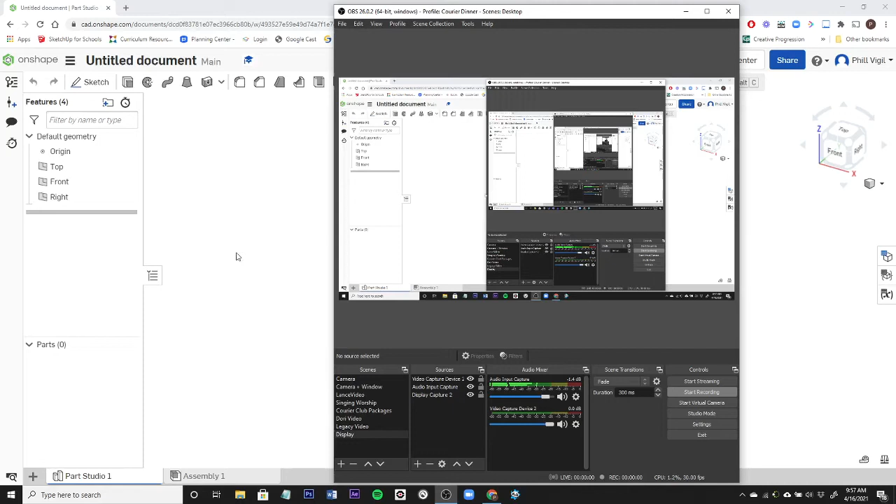Alright, I'm going to make a very quick summary of what the robot assignment should look like. This is just an example. I expect your robot will look different from mine, but there are two basic things we've covered in class

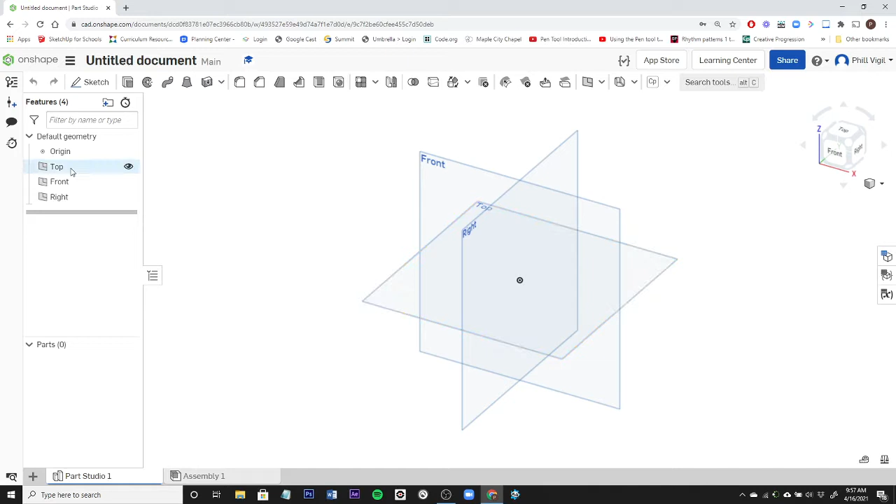that we're going to use and practice while making our robots. The first is like a hinge joint, and the other is a ball and socket joint. So let's get started. First, I'm going to model my basic robot body on the top plane. Let me hide the other planes. And I like to start with a center line, so I'm going to use just a construction line, and I'm just going to make it vertically aligned here.

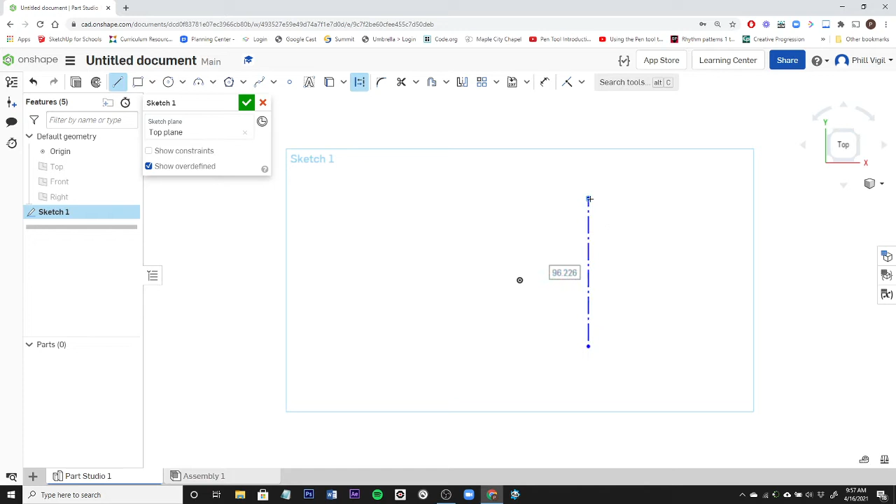And then let's go ahead and dimension this so I have a frame of reference for how large my robot is. I'm going to make this 100 millimeters. And then I want to make this coincident. Let's do the midpoint of this line attached to the origin. Alright, so this is going to represent the height of my robot when it's finished, so this will be the head and the bottom.

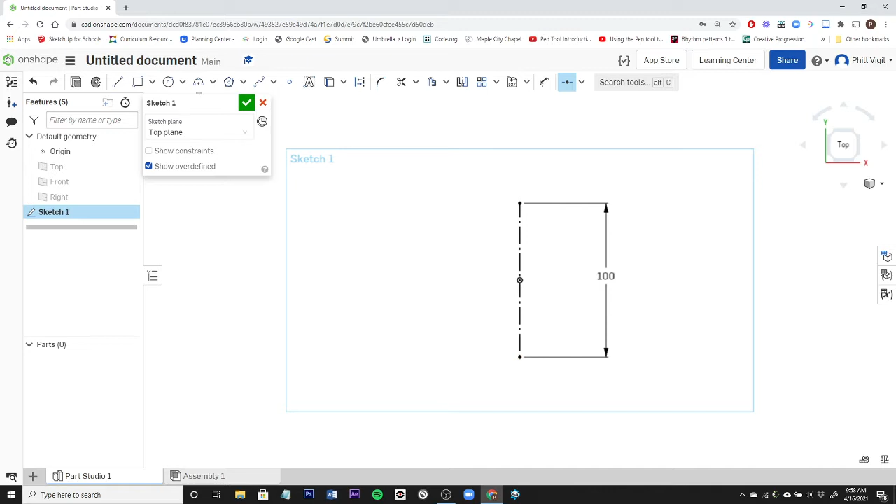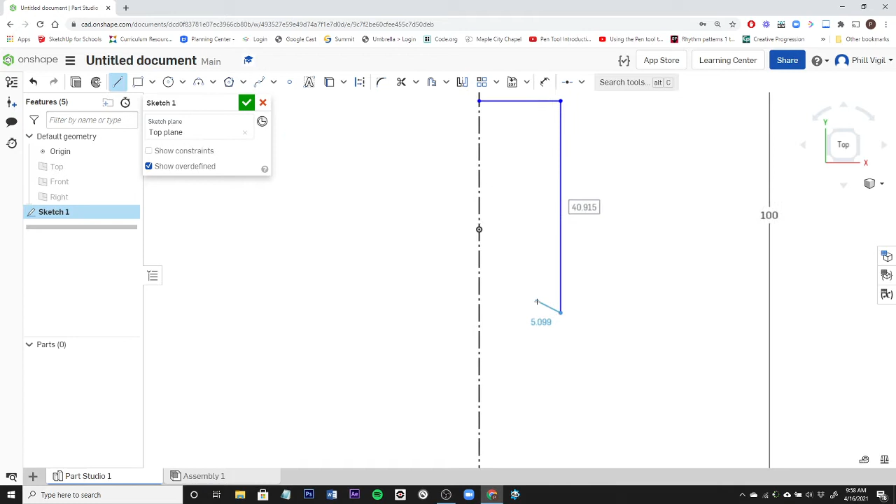Alright, so I'm going to just freehand sketch half of the body. I like to do that so it's nice and symmetrical on both sides. So I'm just going to do the right side first. So imagining the head is up here, I'm going to start the body about right here. Maybe down here. And then I'm going to intentionally make a little cutout where my leg is going to go.

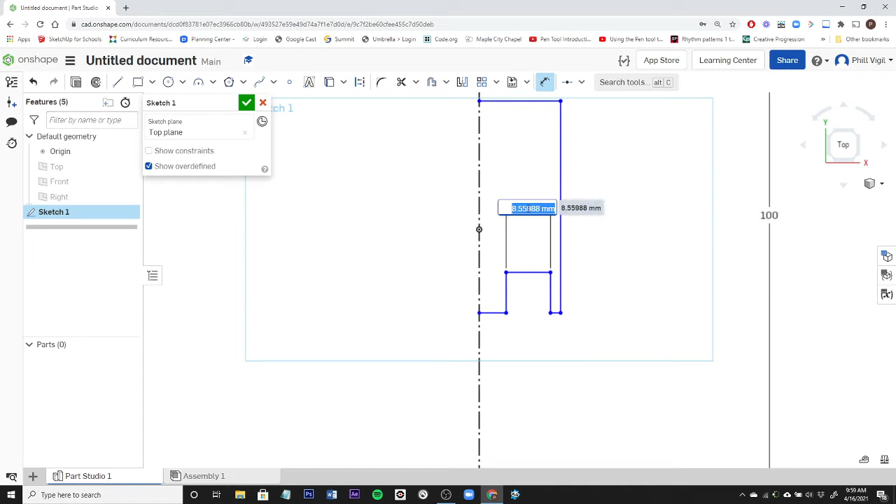I want this to be aligned horizontally. So that's my basic shape here. And just so I have a frame of reference, I'm going to dimension these. So I'm going to go ahead and make these all 10. So that will be 10, and then this will be 10.

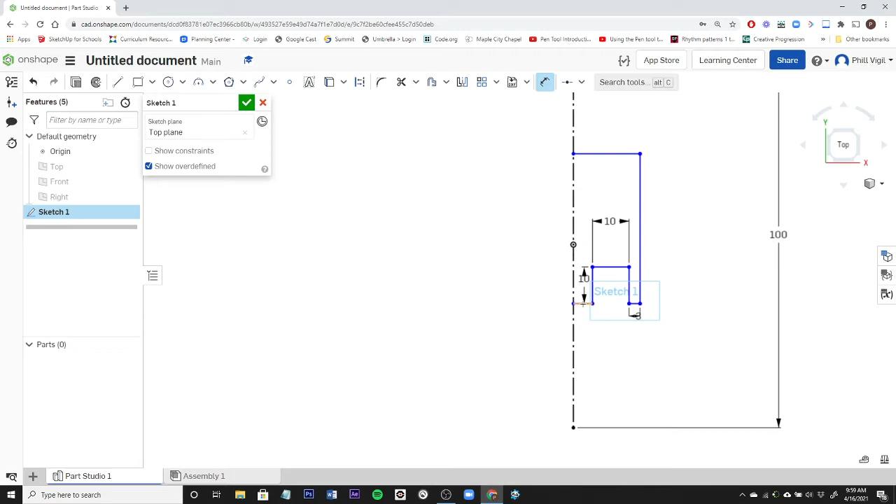And this is a little too small here, so let's go ahead and make that a little bit larger. I'll make it 3. That looks good. Maybe this will be a little bit smaller. Let's make this 3 as well. Okay, so here's my basic body.

Now I want to make a leg that fits inside here. And I could either make a rectangle, place it in here, or freehand sketch. I'm going to choose to offset these lines to begin with. So I'm going to use the offset tool. This is all just part of the sketching process.

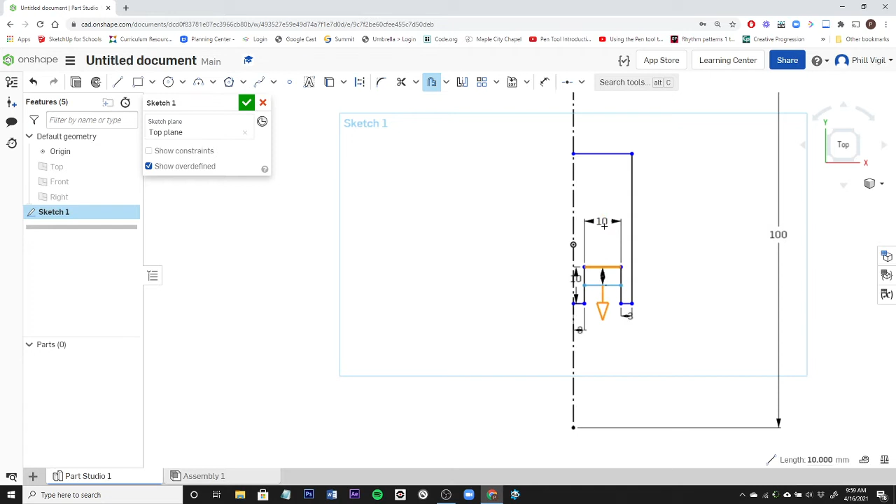So I need to reverse that, and then I'm going to zoom in and reduce the space here. Make it, let's do 1/2 millimeter. I want to also do that line and this line. So that gets me started on a leg, and I have a 1/2 millimeter clearance all around the sides. So I'm done with that, so I'm going to press enter to accept that.

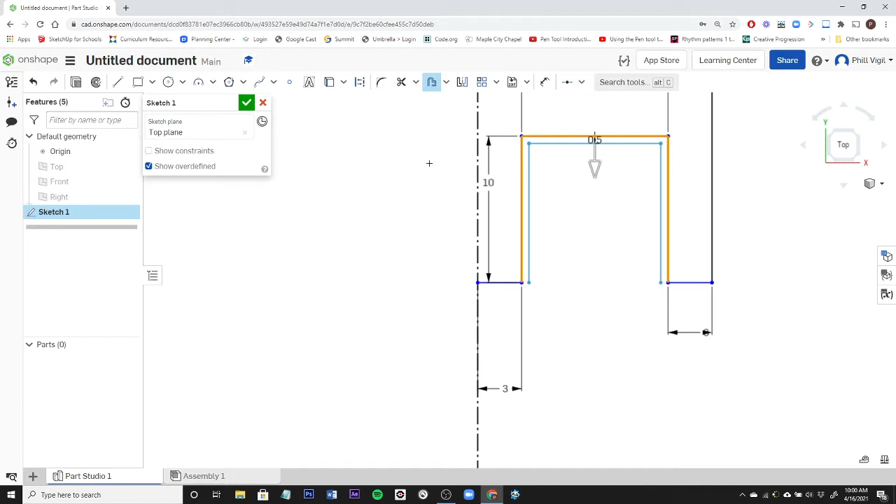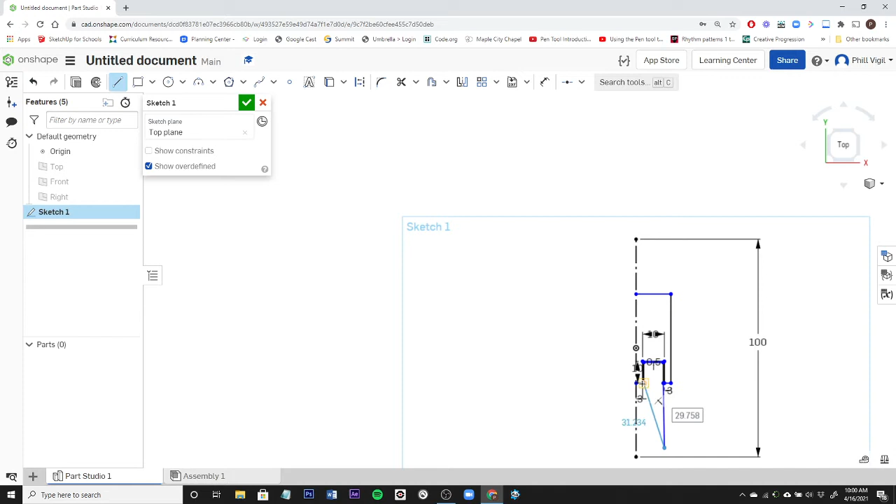Now I just need to extend these legs out. I'm just going to use some lines here. And I want this leg to go all the way down to the bottom here. I'll do a little bit shorter than that. I want to be vertically aligned with that line, and then attach it here. Oh, that was the wrong line, wasn't it? I may have attached that to the wrong line.

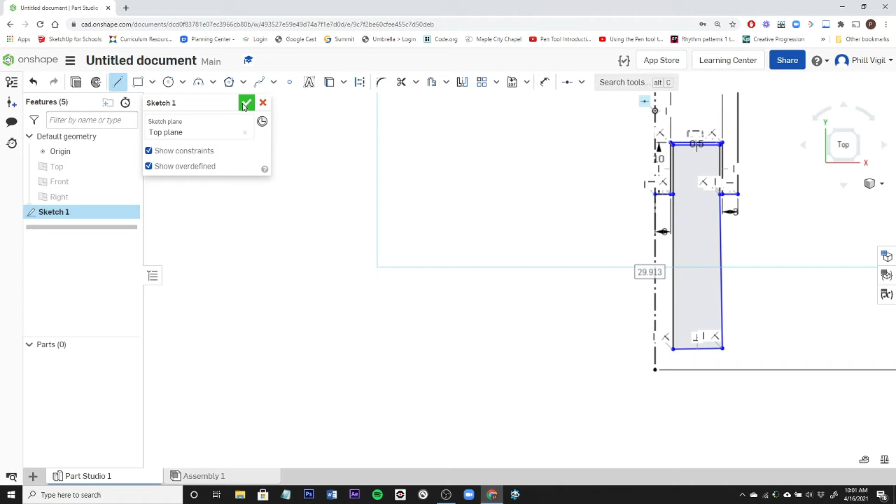That looks slightly slanty. So let me go ahead and show constraints. Did I align that horizontally? That looks good. So here's my leg. That's a closed shape. You can see now that it has a shading to it. So I could extrude that.

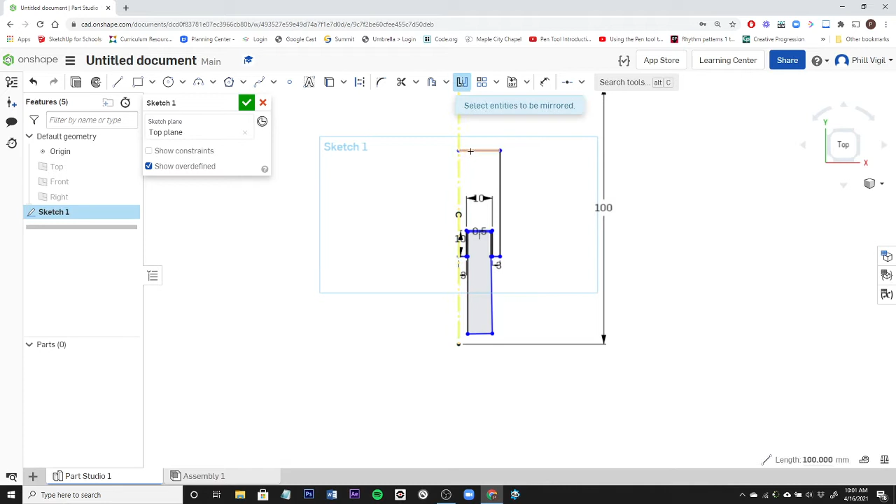I need to mirror my body so I can also extrude my body. So I need a mirror. I'm going to select the mirror line, which is the center line, and then choose the items I want to mirror. Now I have a closed shape here that I can extrude.

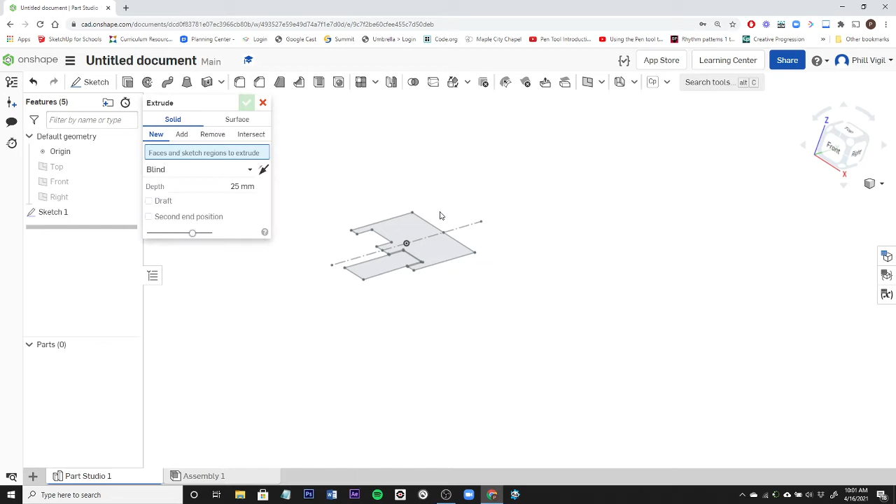I'm going to accept my sketch for now and go ahead and extrude these parts. So I'm going to use the extrude option. I'll do the body first. And I want to make sure that this is symmetric up and down. And then that's a little thick of a body. I'll do, let's do 15 millimeters, see what that looks like. Let's do 10. Okay. And then I'm also going to, so click the check mark for that, that's the body.

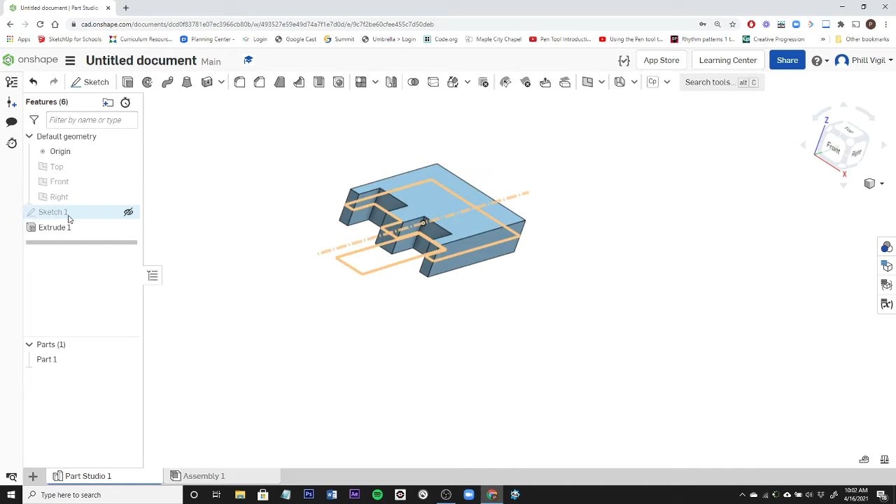The next thing I'm going to do is model two cylinders. One is going to be attached to the body. The other one is going to be used to subtract a hole inside the leg.

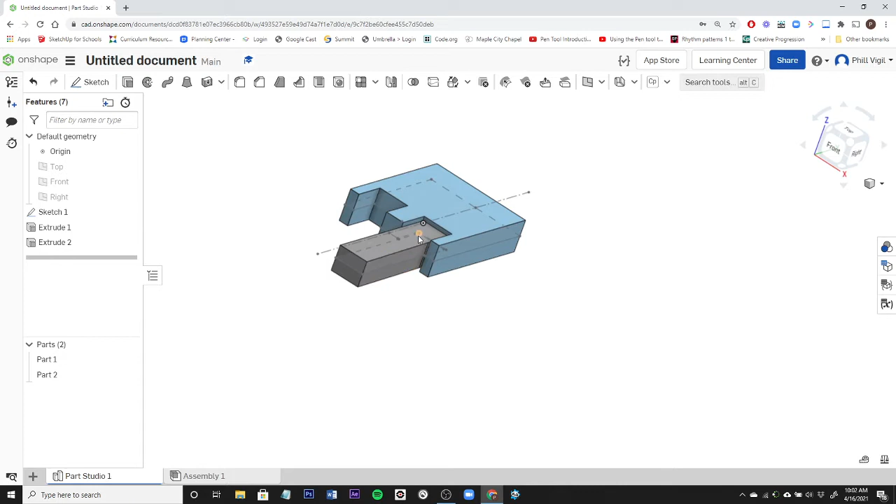Let's go ahead, and I'm going to be drawing on a new plane. I'll use the side here as a reference point. So I'll create a sketch and click on this face for my plane. Now I can sketch along that plane.

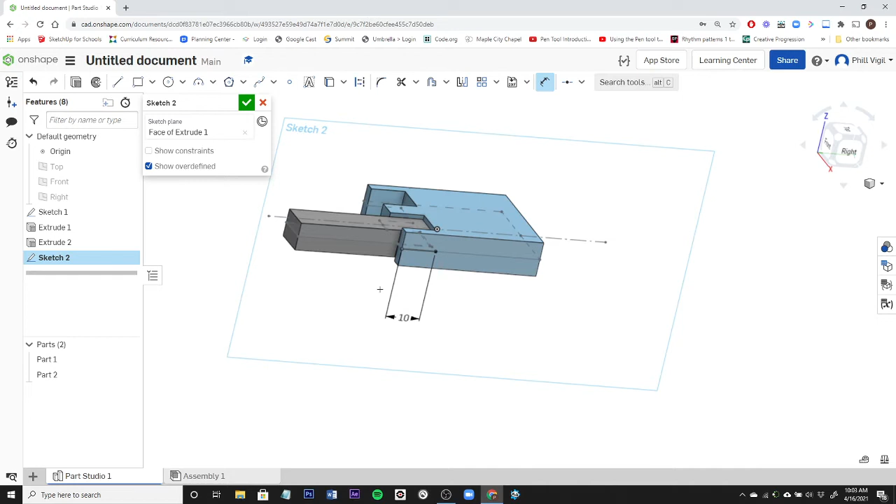I'm going to draw just a simple line here and make sure that it's 10 millimeters. If you remember the previous sketch, we made this opening 10 millimeters, so that's 10 millimeters this way and 10 millimeters that way. At the midpoint is where I'm going to place my first circle.

I'm going to grab the circle tool, use the midpoint there, and let's make this one 5 millimeters. This will be the larger one.

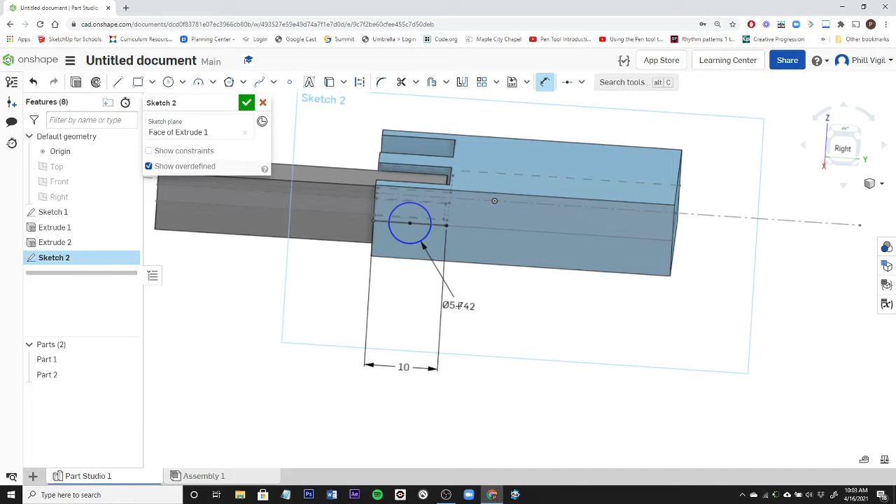I'm done with this sketch for now, and I'm going to extrude it. I want to use the extrude tool to extrude both halves of the circle, and I want to extrude it in the opposite direction.

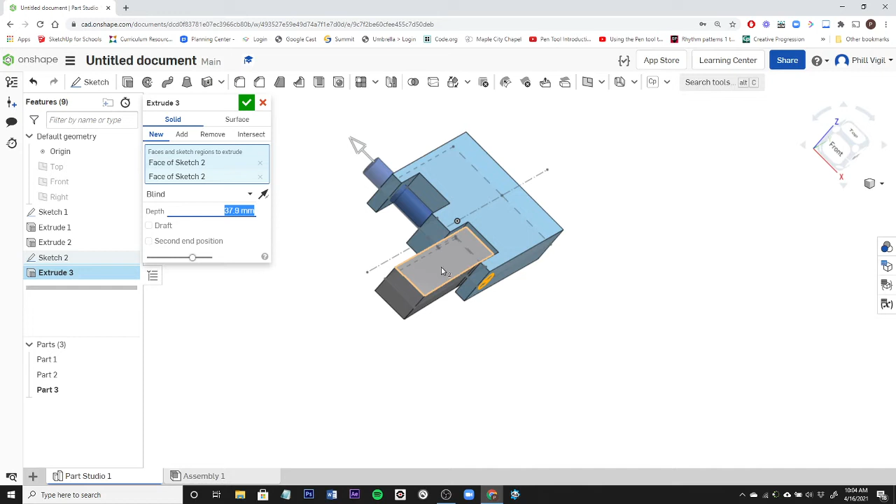I'm going to be creating a new part. Because it's touching multiple parts, it's assuming I want to add it to an existing solid, but I don't—I want to create a new solid. This one I'm just going to extend beyond the edge, because I'm using it to subtract from the leg. That's all for now. I'm going to choose the check mark.

Now I need to create another sketch, which is a cylinder that will be attached to the body. This will all make sense in just a little bit. I want to choose this same plane, and I'm going to hide my solid so I'm not distracted by that cylinder.

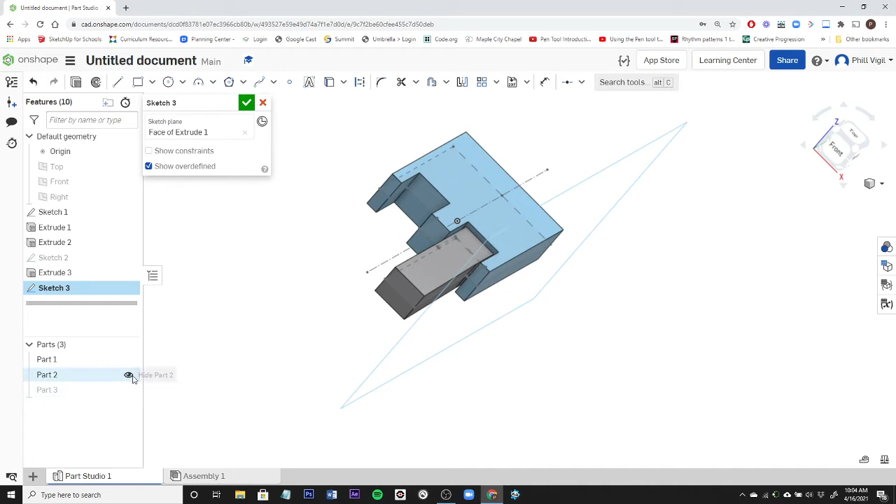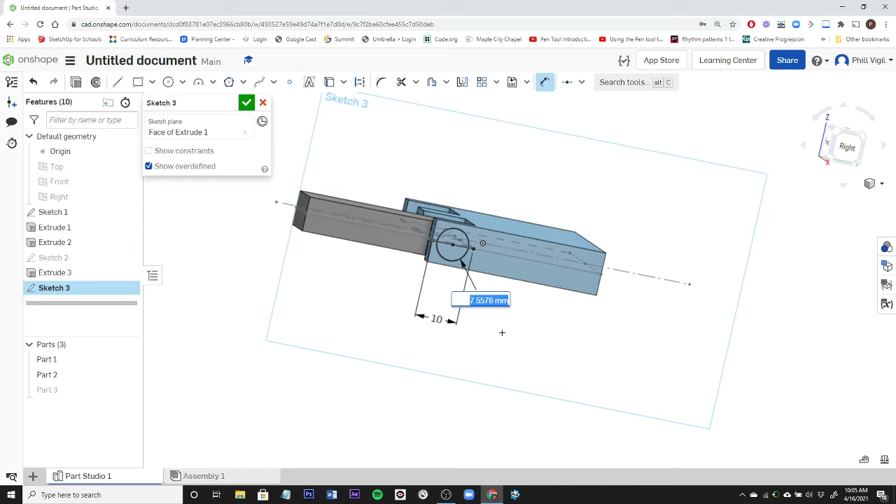I'm going to do the exact same thing here: attach a line and dimension it as 10 millimeters, then create a circle at the midpoint. This one's going to be smaller, so let's do 4 millimeters. That will give me a half millimeter clearance on either side of the circle.

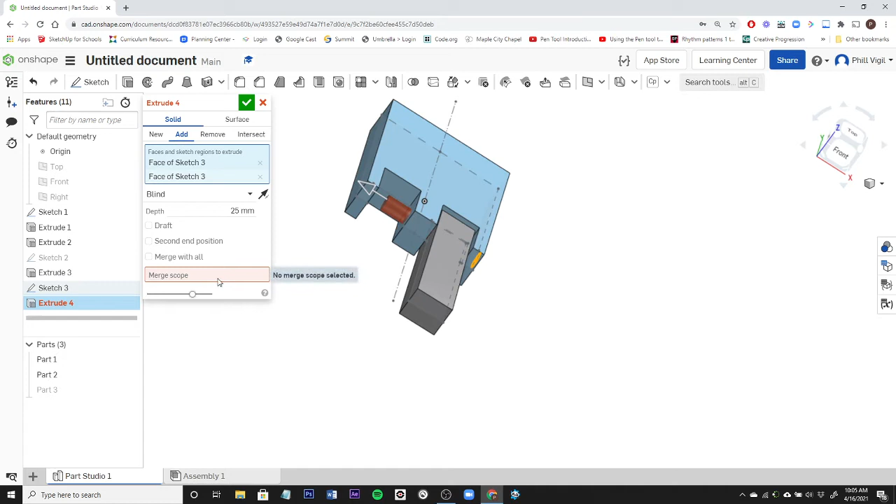I'm done with that sketch, and then I'm going to extrude this, both halves, and reverse the direction. This one I do want to have attached to the body, so I want to add it to the body. Right now there's something wrong with the merge scope, so I want to merge with this body, and then extrude this up to this edge here.

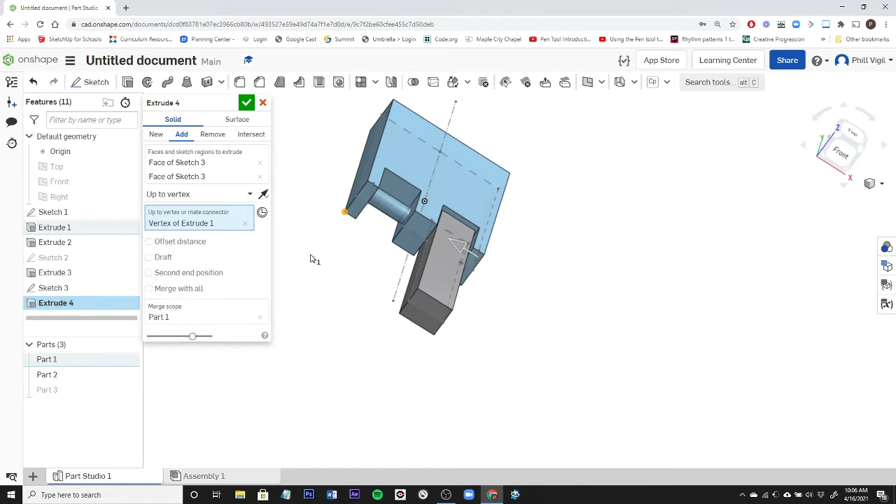Instead of blind, I'm going to choose up to vertex. I can choose a vertex in my drawing and it will extrude up to that point. I'll click the check mark, and now I've added that to my body.

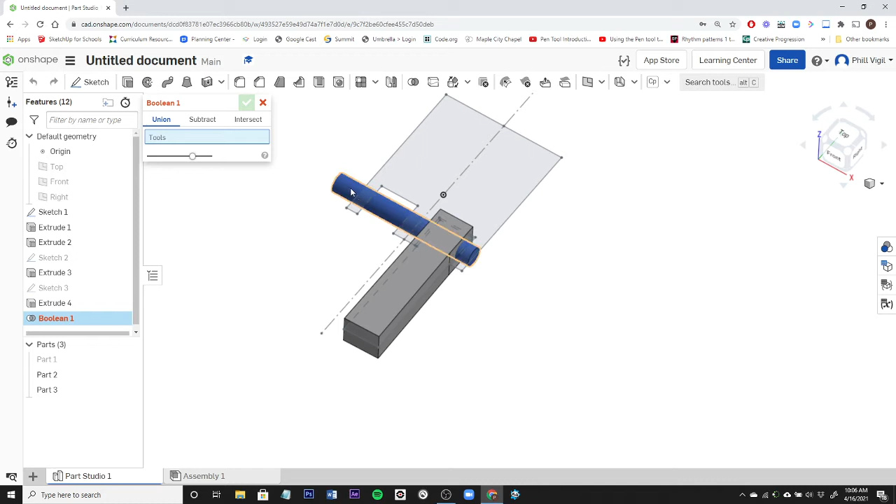I'm going to hide that for now so I can focus on the leg. What I want to do with this is use the cylinder to subtract from the leg, so I'm going to use the boolean operation. The tool is going to be this cylinder. I want to subtract, and the target is going to be the leg.

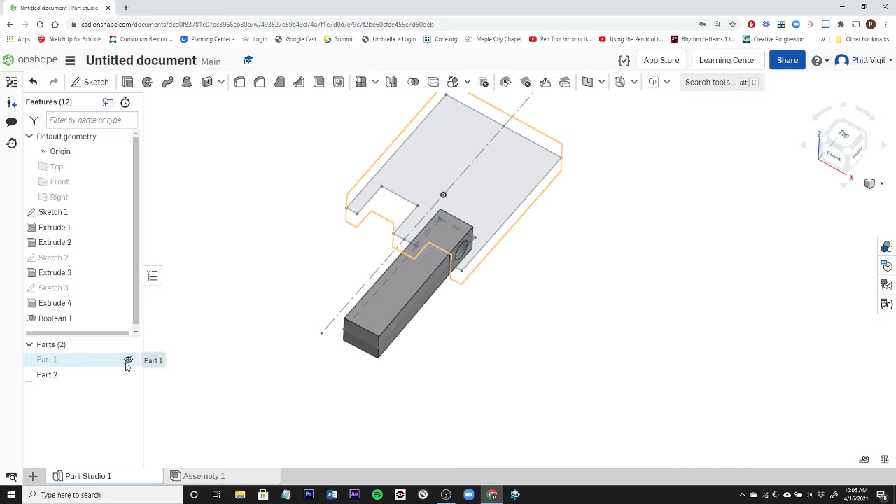I do not want to keep the tools, because if I keep it, it will just keep the cylinder there. I'm going to deselect that so it disappears after I use it. Now I'm going to reveal the body, and let me change the view so you can see through it a little bit.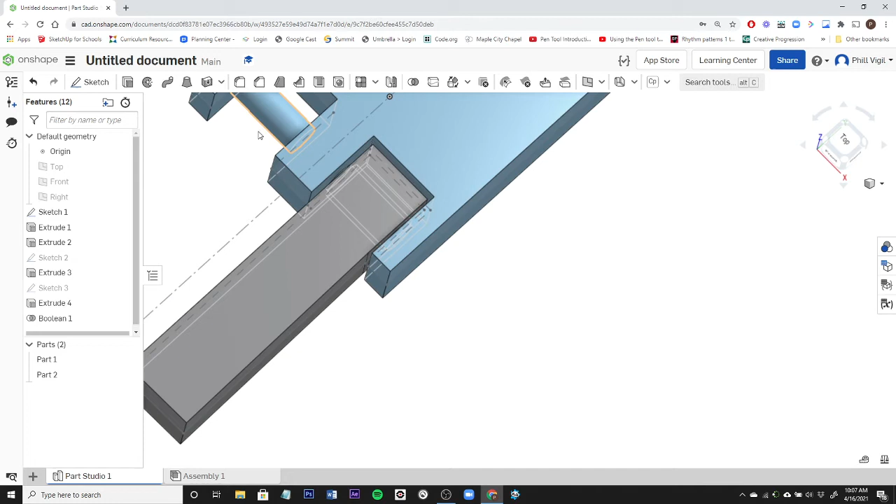Now you can see inside here the leg opening is larger than the rod that it's going to eventually spin around to be able to move. So that's a basic hinge joint.

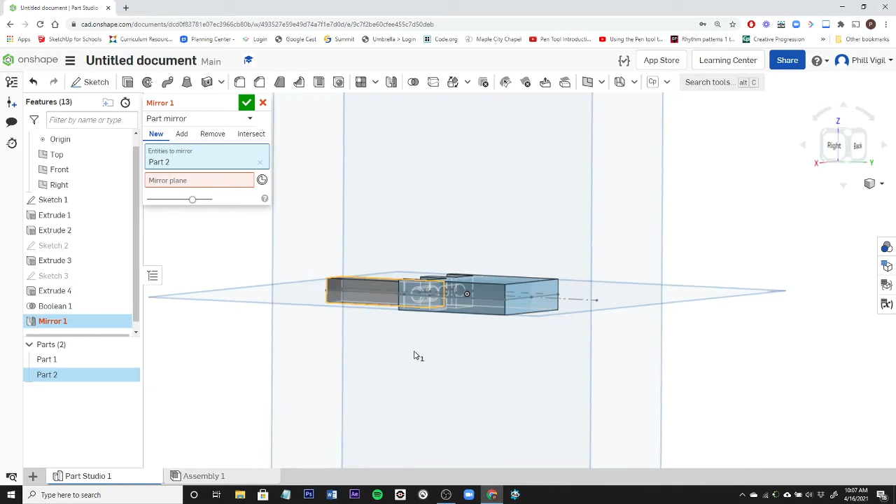I just need to mirror this other leg over there. So I'm going to go ahead and click on the mirror tool. Entities to mirror would be the leg. The mirror plane, let me go ahead and reveal my planes here. The drawing plane I want to use is the right plane. So it's this one here. Oops, I have to click on the option first and choose the right plane. We're going to mirror that over there. Click the check mark. So now I have two legs.

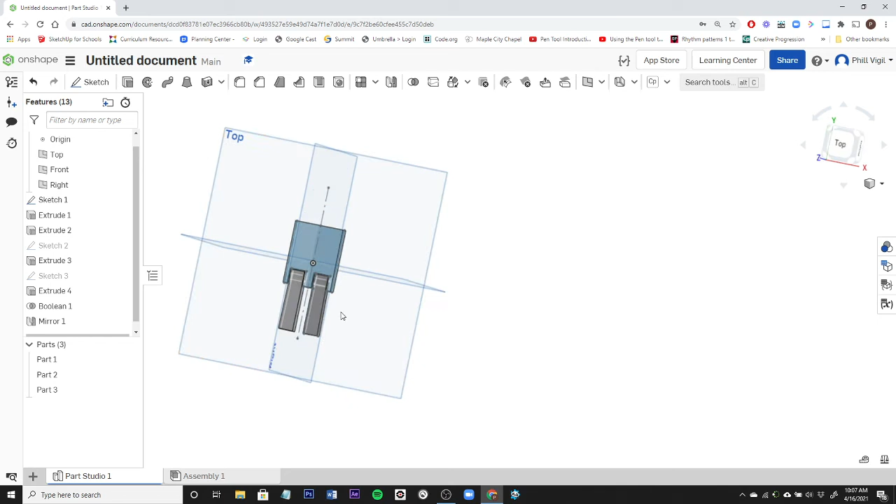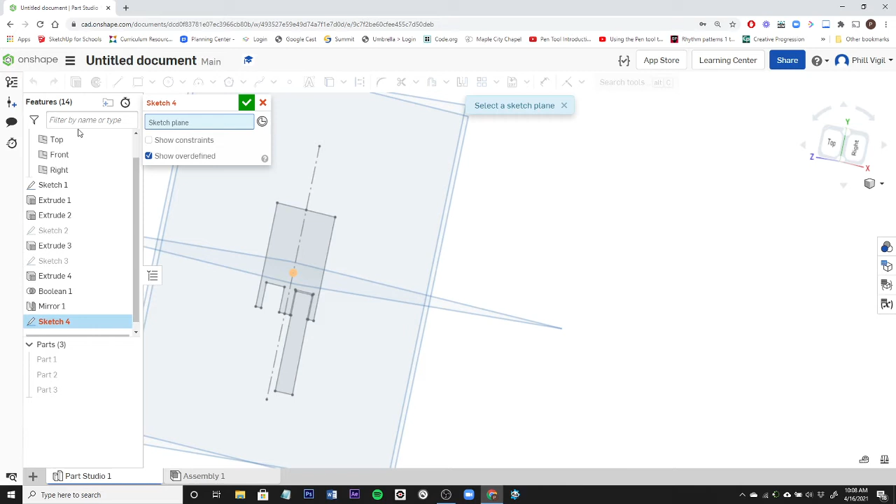So that's the hinge joint. Now I need to focus on the socket. So I'm going to go back to my drawing. I'm going to hide my solids for a moment. So I have my sketch visible. I'm going to create a new sketch on the top plane, and let's view normal to that plane.

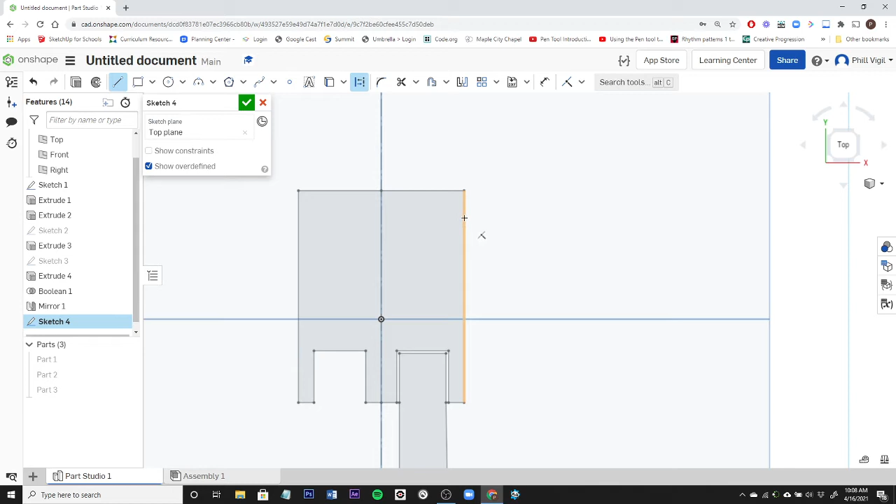So I'm going to create a ball and socket joint here for the shoulder. I'm going to place a guide line here, a construction line, about where I want the shoulder to be. And I'm going to make a point here where I want the center of the circle for my sphere to be. So I'm going to guess about right here.

Now I'm going to create a circle, and this may be too large, so let's escape out of that and dimension this a little bit smaller. I'm going to grab a circle tool, and I purposely want some of the circle outside. So let's make this one a diameter of 6.

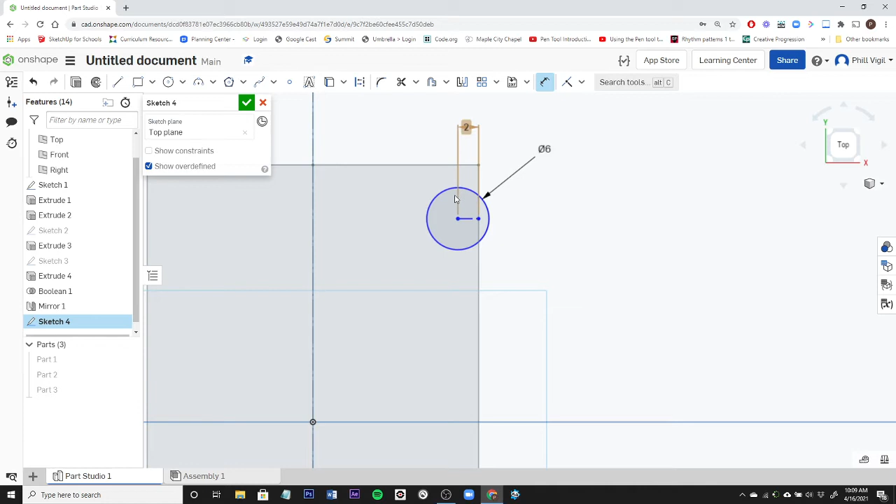And then I'm going to create a sphere by dividing this in half with a line. So I grab the line, referencing with a dotted line until I get coincident with the edge. I'm going to click there and then draw a straight line down to intersect with the other side of the circle. So now I've divided it in half. I have two different regions here.

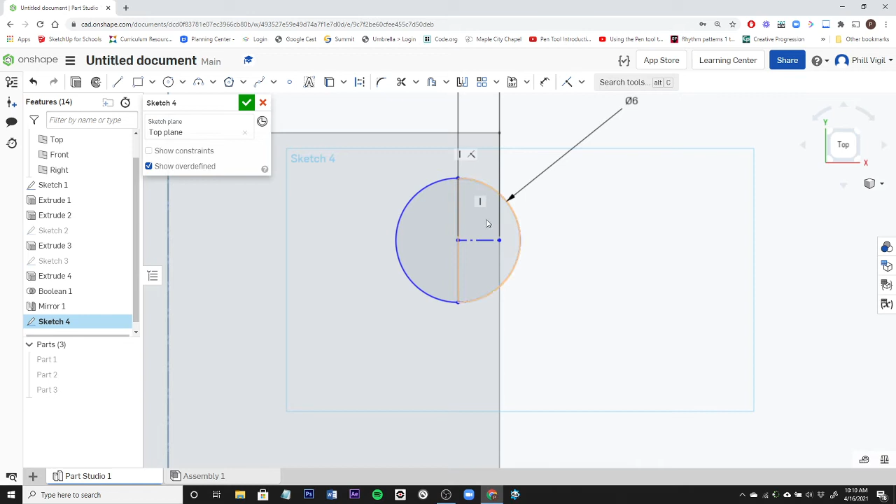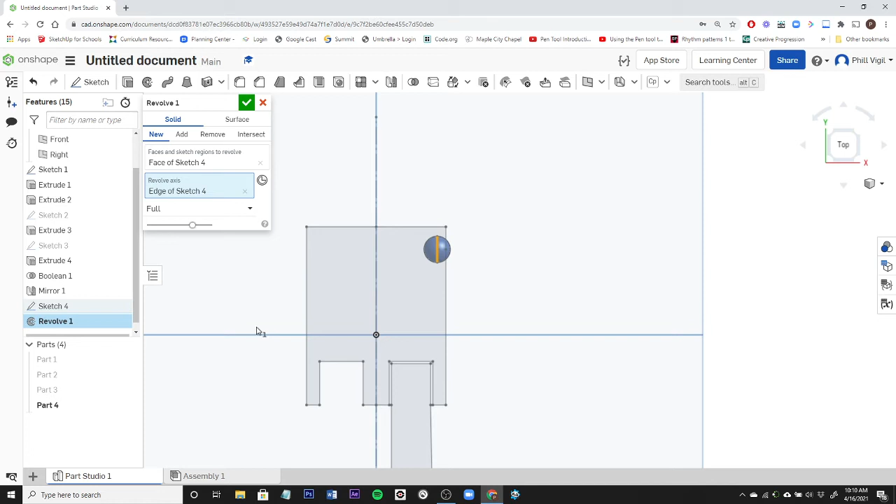Now I'm going to revolve one half. I want to just do one face. Let's do this one, and choose the revolve axis as the center line. Now I've just created a sphere. I'm going to click the check mark. This is a new solid, and I'm just going to hide that for now. So that one was 6 millimeters.

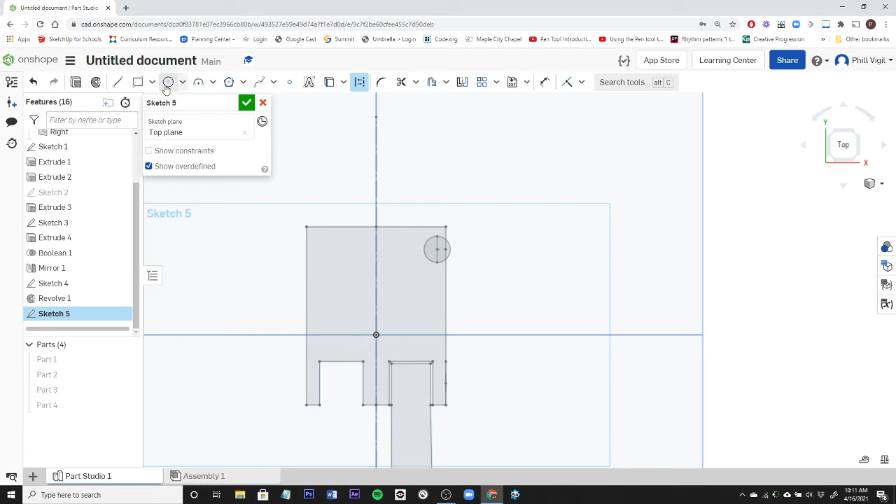The next one I'm going to create is a little bit larger to give some space. So I'm going to do the exact same thing. Sketch, same plane, the top plane. Actually, I need to reveal the other sketch to get in the same spot. Sketch 4 is the one I want. So now I have the construction line I can reference. Let's grab a circle, and this one's going to be larger, so let's make this one 7.

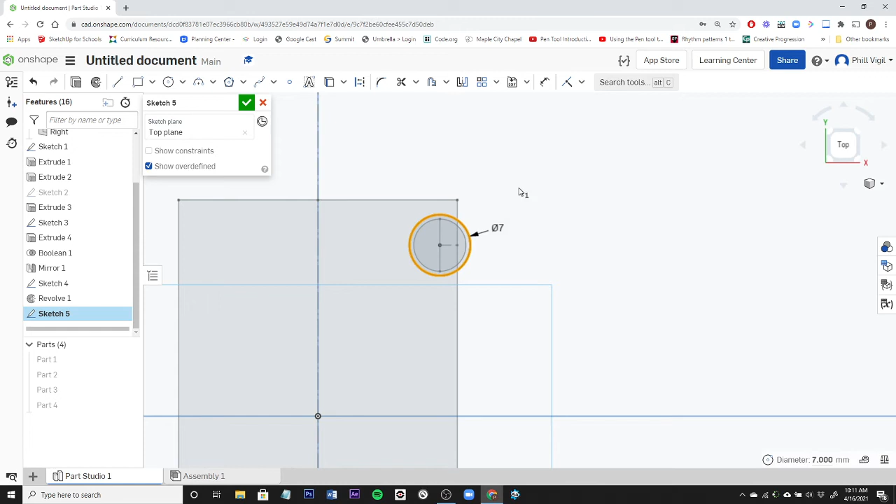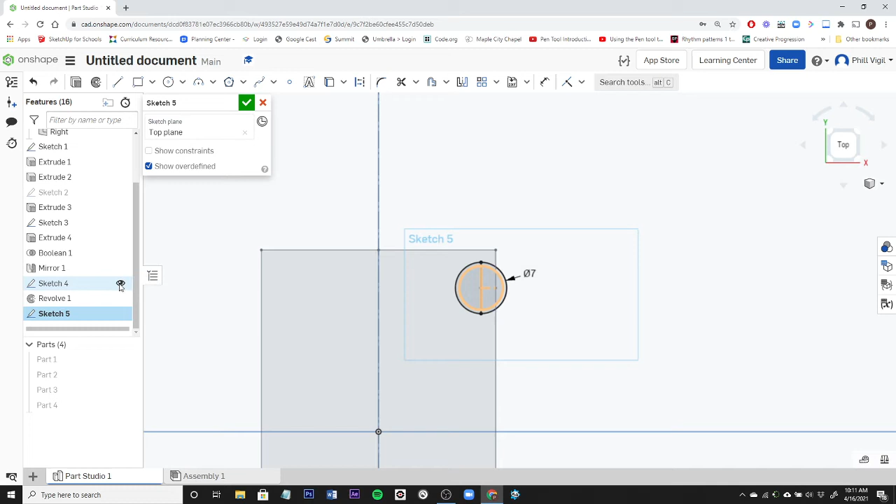Oh, that's a construction line. Let's switch that over. There we go. Then I need to draw my line to divide it in half, and I'll hide the other sketch. I'm going to revolve this, making sure I just have half. The revolve axis is the line. Click the check mark. So now I have two spheres. Part 5 is larger than part 4.

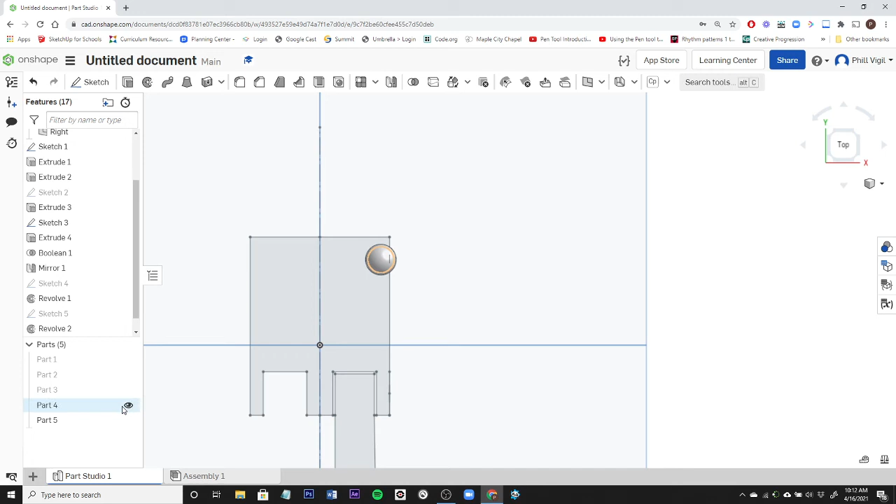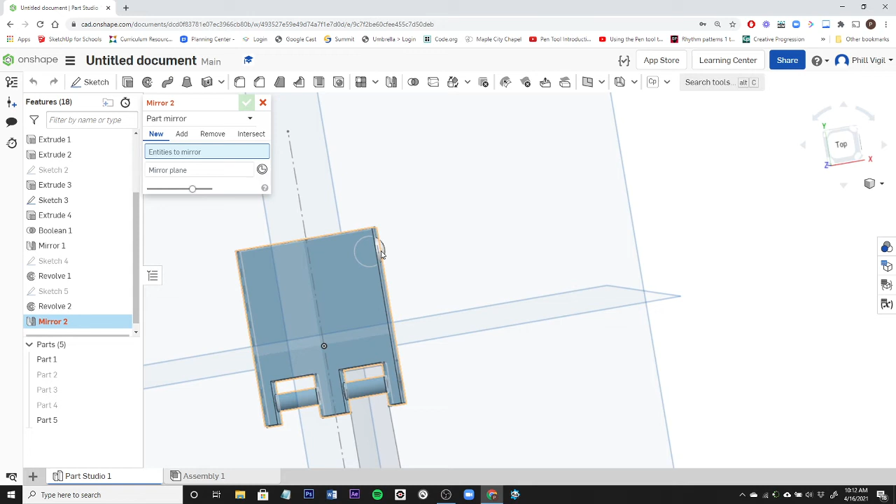So part 5 I'm going to use to subtract from the body. I'm going to hide part 4 for now and reveal the body. I actually want one of these on either side, so I'm going to mirror that over, select the sphere, and select the mirror plane as the right plane. So now I should have two. Click the check mark.

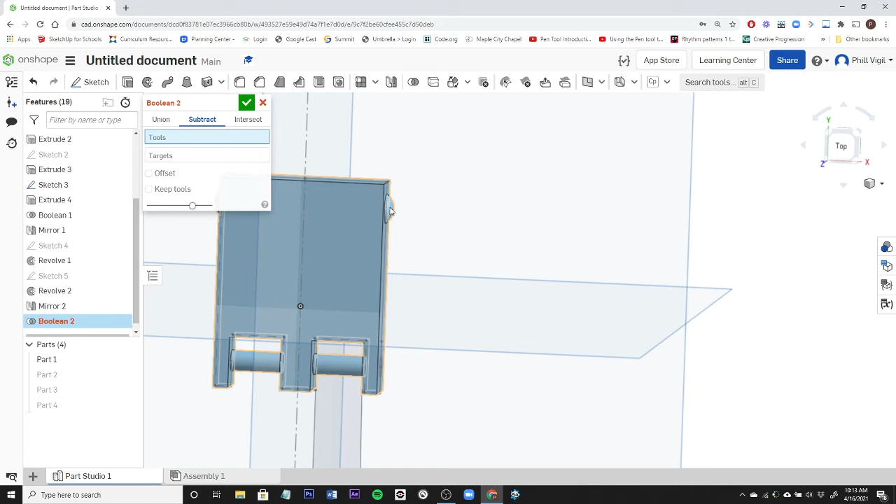And then I'm going to use the boolean function to subtract. The tools I'm going to use are the two spheres, this one and this one over here. Whoops, I just deselected it. Oh, I added somehow. Let me get back. So when I mirrored the part, it added to the body. I want those to be new parts.

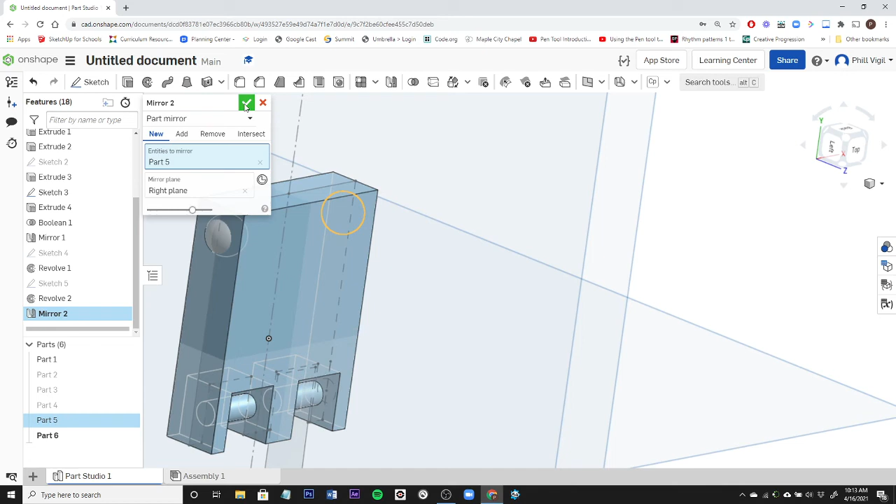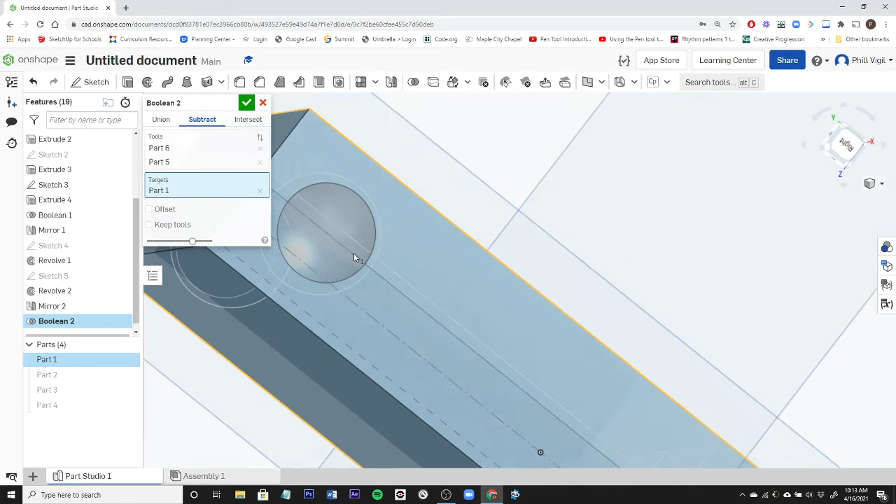Alright, so those are separate. So now I should be able to subtract with the boolean. So the tools I'm going to use are the spheres. Then the target is going to be the body. You should be able to see that there is now a sphere-shaped hole in there.

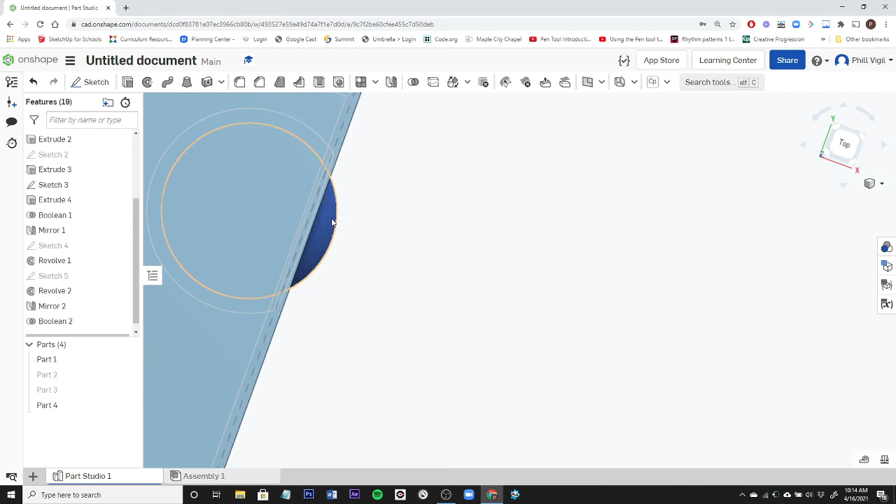Click the check mark. And now you can see I'm going to reveal part 4, which is just the other sphere that's inside there. So now if I attach something to this sphere, my arm specifically, it will be able to rotate in there. So now what I need to do is model an arm.

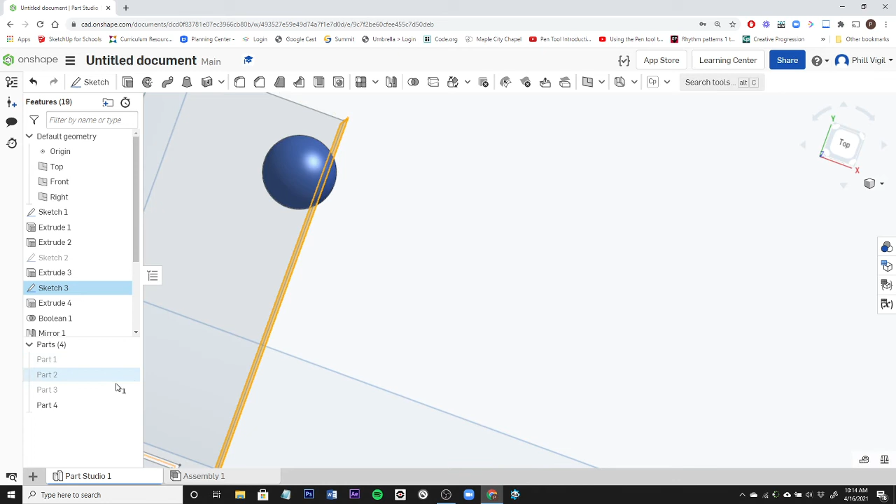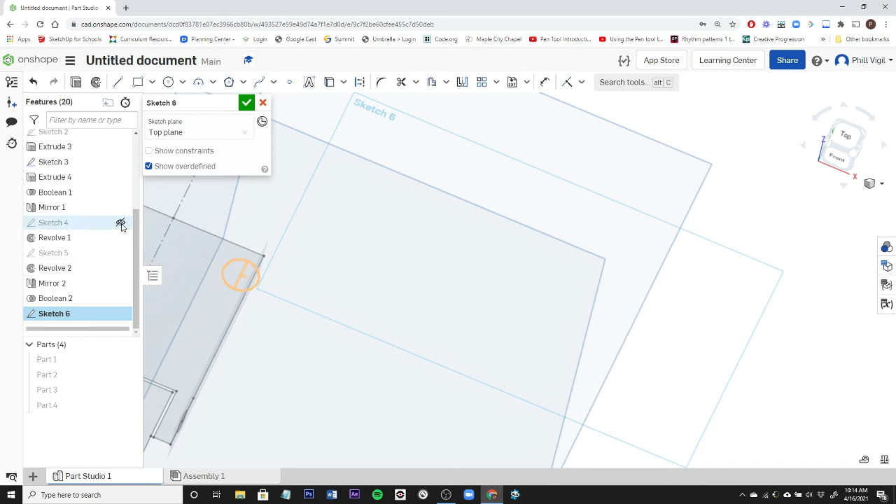So let's go ahead and get back into my sketch. Let's reveal sketch 1, which is the body. Oh, it's already revealed. Let me go ahead and hide the solids. Alright, so let's go ahead and create another sketch. We're going to be on the top plane again. Sketch 4 is the one that has the sphere that I'm attaching to. Okay, and let me go ahead and press the N key and then view normal to sketch.

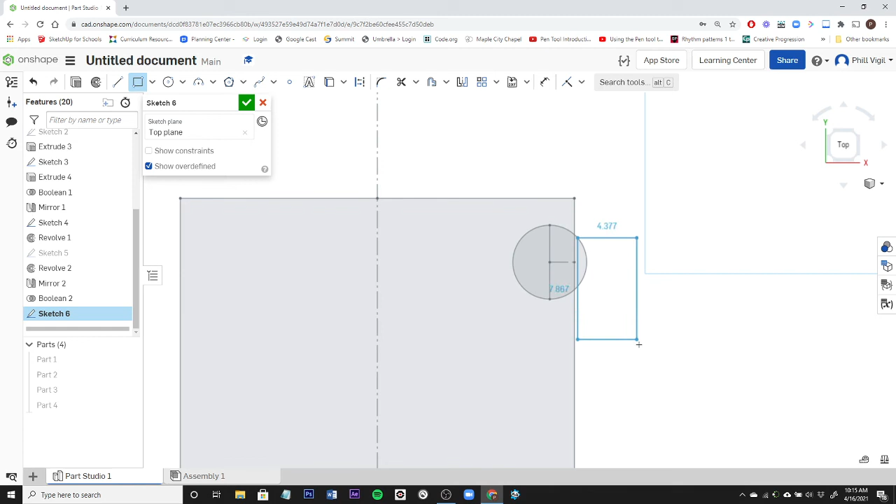So this is where I want to draw my arm. I'm just going to use a basic rectangle tool. And let me go ahead and attach it. Let's say about right there. I'll zoom out so I can see what a normal length of an arm would be. Say about right there.

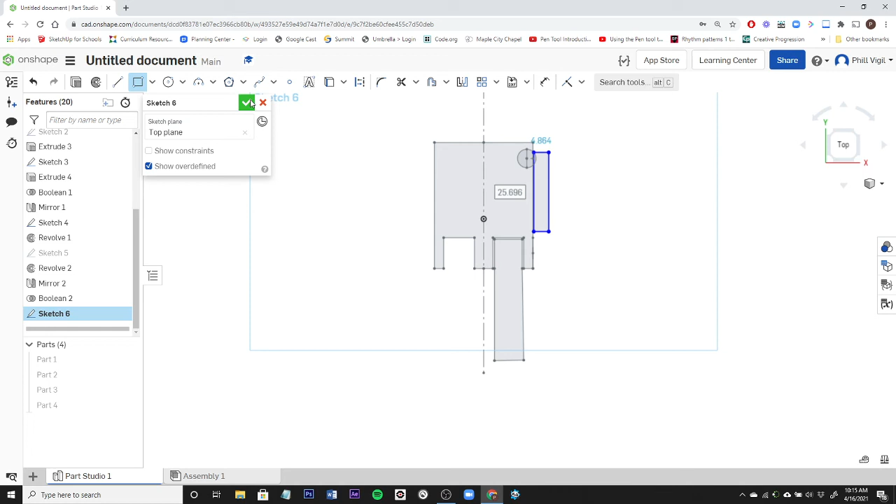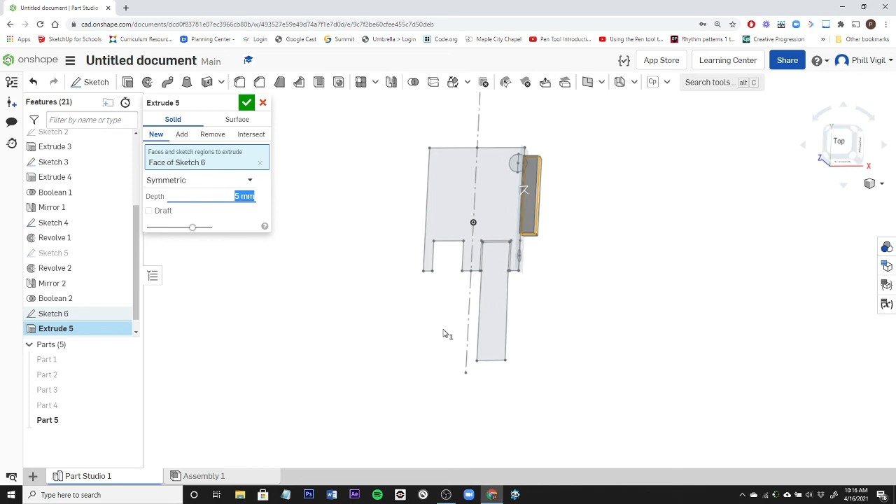So now I have an arm, and I'm going to accept the sketch, extrude this. I want it to be symmetrical, and let's do, the leg was 8, so let's do 5. See what that looks like. That looks pretty good. Click the check mark.

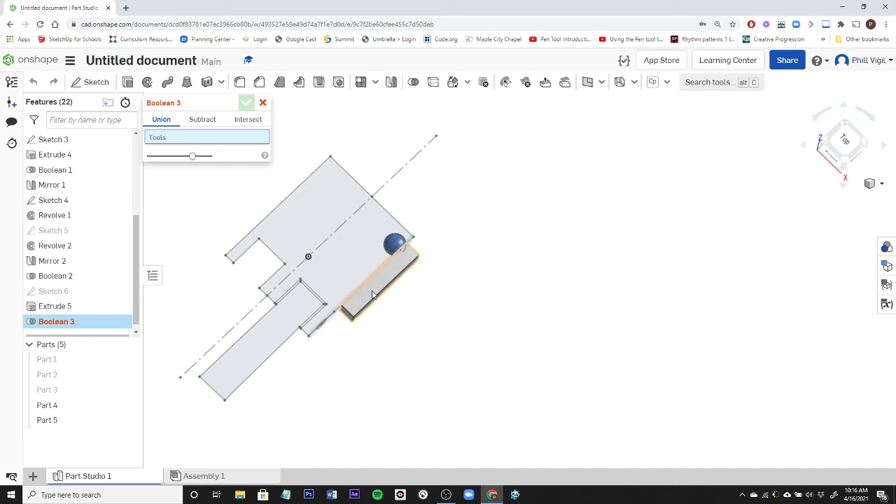So now I have an arm, and I have part 4, which is the sphere that the arm attaches to. So I need to combine these two parts together. So I'm going to use a boolean function, use union. I'm going to choose these two parts. So now we're combining those two together into one solid. Click the check mark.

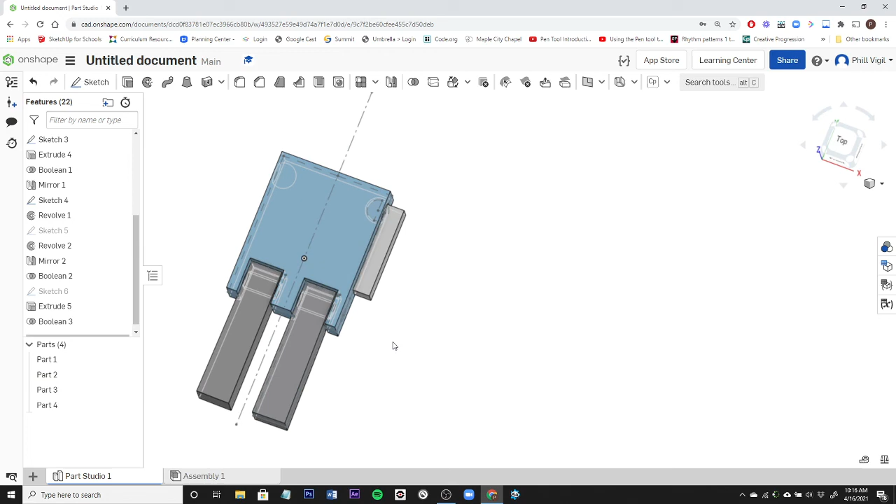So now that arm should be able to spin around inside the body. So let's go ahead and reveal the body. And then the 2 legs. So that fits inside there, and that should be able to rotate around. What I need to do now is just mirror this on the other side. This is the object I want to mirror. And then my mirror plane is going to be the right plane.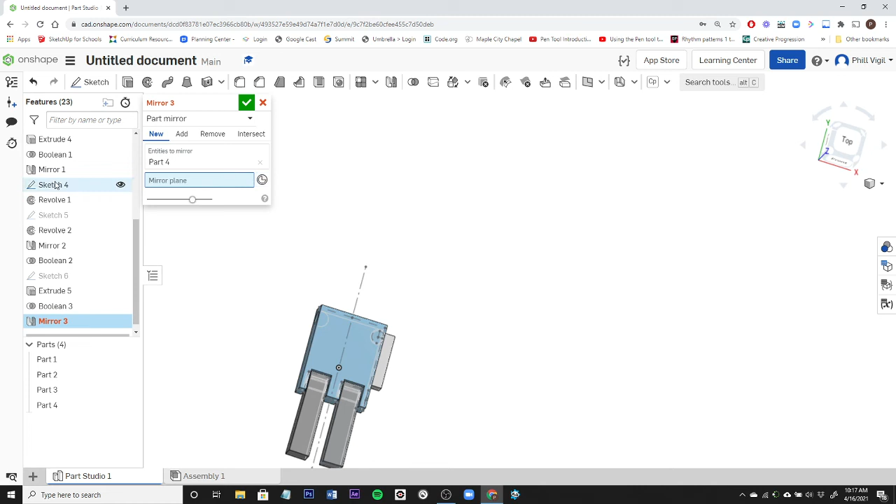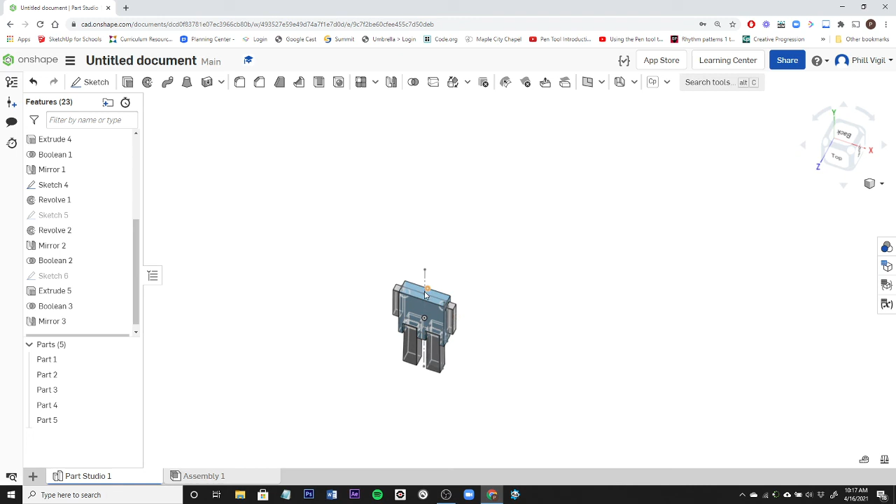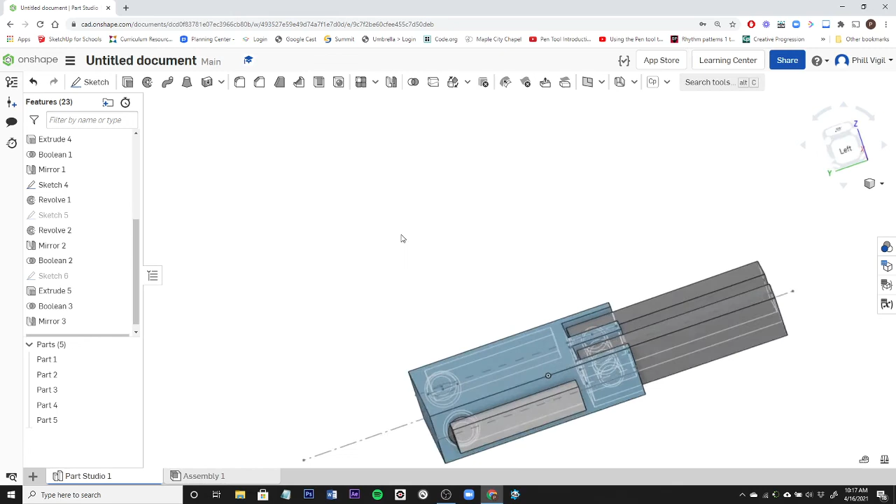So now I have 2 arms and 2 legs, and they should be able to be moved. The last thing I would do would be the same thing I did for the arm. I would create a sphere inside the body right about here, and then attach the head to the sphere. There could be like a little neck part too, if I wanted to do that. But for now, those are all the concepts that you need in order to create your robot.

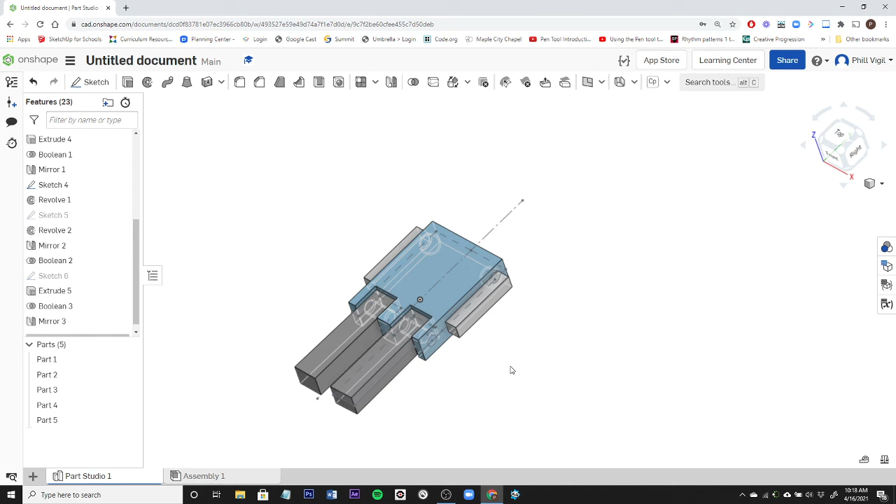So we're using 2 different kinds of joints. This is a hinge joint, and then this is a ball and socket joint. And you could do multiple joints if you wanted to have it bend at the knees. You could create another joint here. You could have it have a hinge joint at the elbow as well. So now that you know conceptually how to make it work, just be creative, and I should expect that you have something that looks a little bit different.

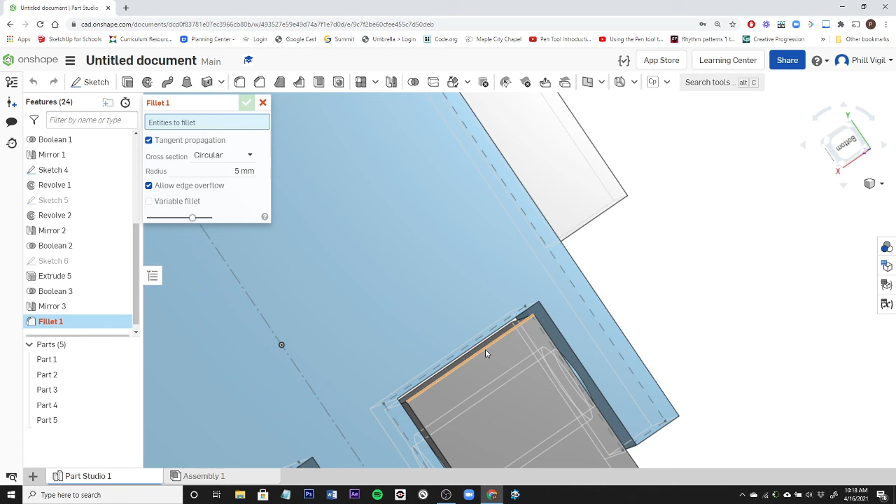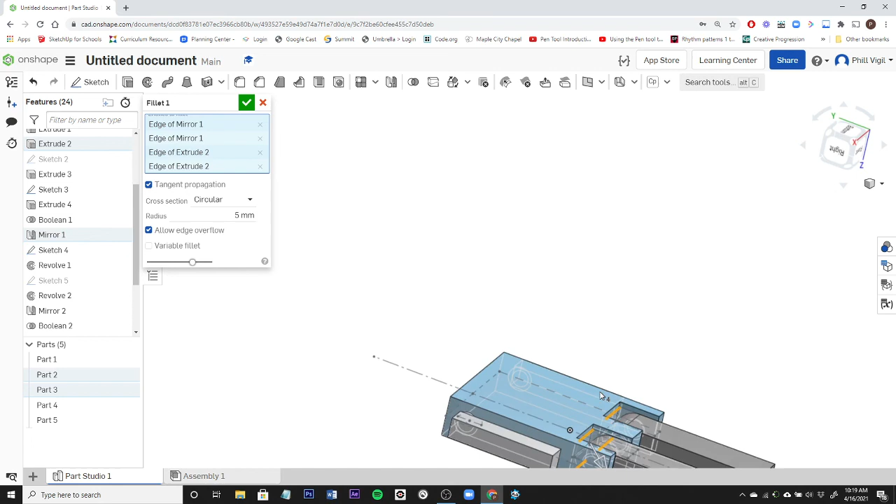Some of the technical things are this would not be able to rotate because you have a square inside a square opening. So you need to have this edge rounded. There's a tool for that. So you want to use this tool, the fillet tool. That will allow you to round the edge. Go ahead and select all the edges here. So now that leg would be able to move inside that hinge joint.

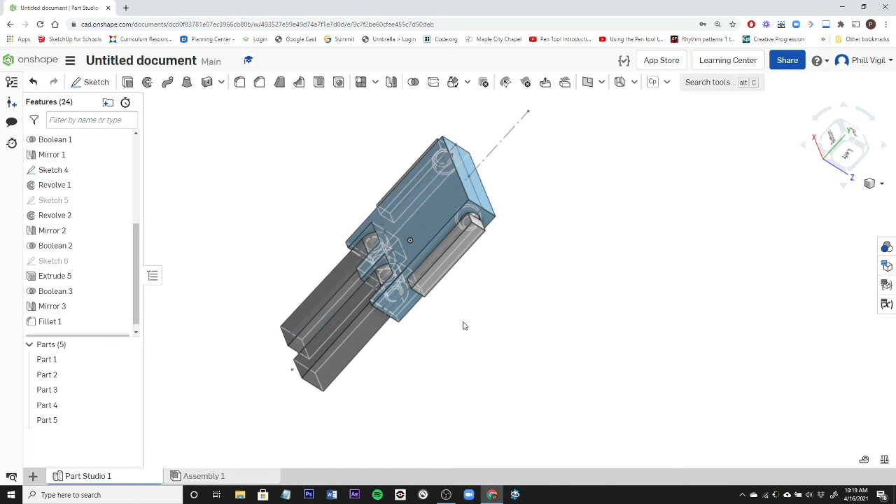So this should help you get started if you haven't already started. And you have a couple more periods to finish this project. So just be creative and let me know if you have any questions.